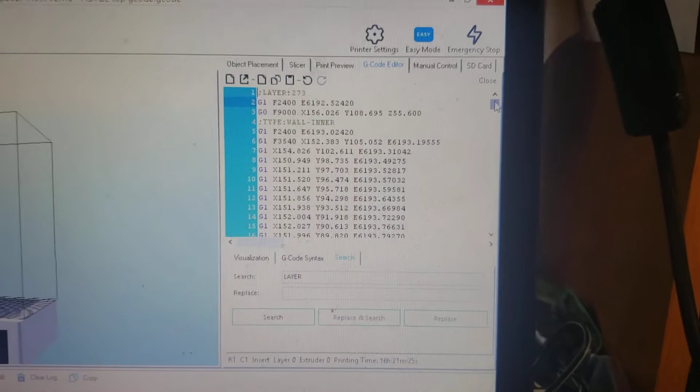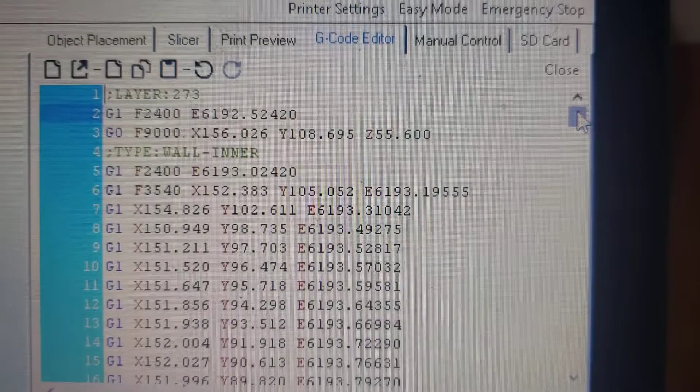You've got to erase the G-code that's already printed, so I've already done that. I'm going to start on layer 273, and the last reading I had on my printer was Z55.600. When I measure it with calipers, it's about 55 millimeters above the print bed, so I deduced it stopped at 55.600 and erased all that code. That's going to be the next layer, layer 273 is where I'll start. Looks good. So here's the problem.

They also said you have to home Y and X and Z, got to home all of them first, right? That's what you're supposed to do. So I've already preheated it, started heating my bed. I'm going to show you what it does.

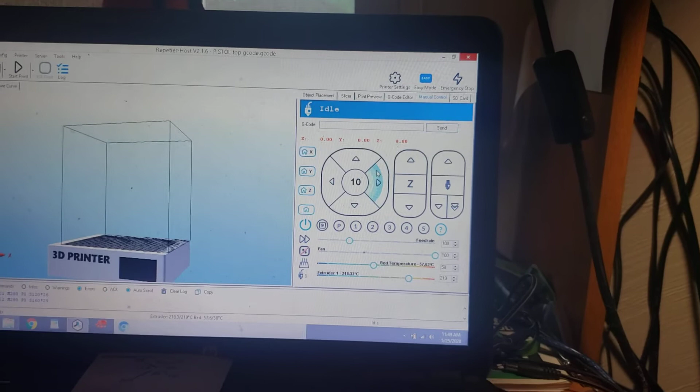It's kind of crazy. My problem is I can't home my Z because the print's in the way. So if anybody has any ideas, because I really don't want to start this over. It went 12 hours and stopped, and it was a 24-hour print. It's a lot of wasted filament.

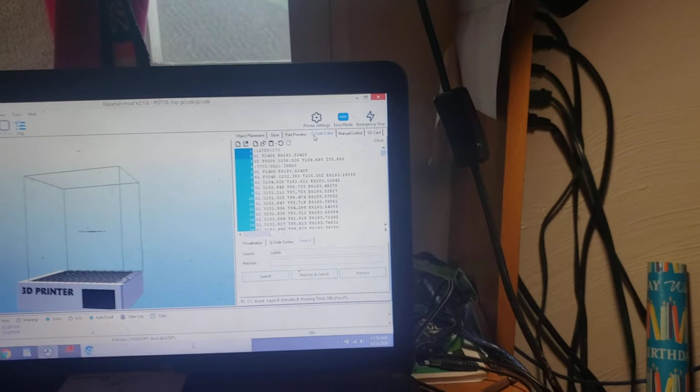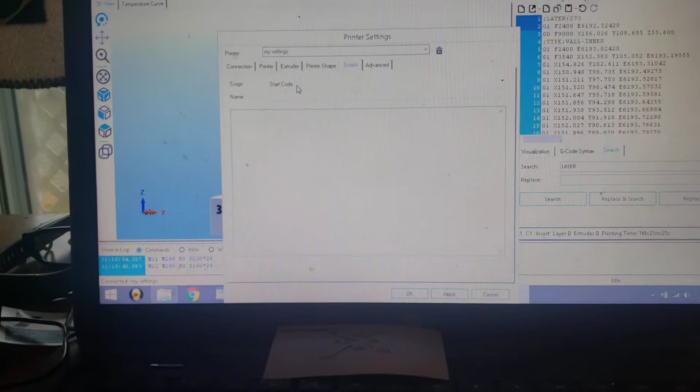So I need some help if anybody has any ideas. Here's what we're going to do. I've already edited the G-code and taken it out of my printer settings too. So I go here, config printer settings, and put it on scripts. My start code, I don't have the bed leveling or auto home in there anymore. I usually leave that in there so it does that first when I hit print, but it's all right, that's out. That was the other thing I was going to do.

All right, we're going to go ahead and hit print, and I'll show you what it does, but I'm going to hover over the e-stop just in case. Let me pull my BL Touch out, I've got to do that too, otherwise it'll be dumb.

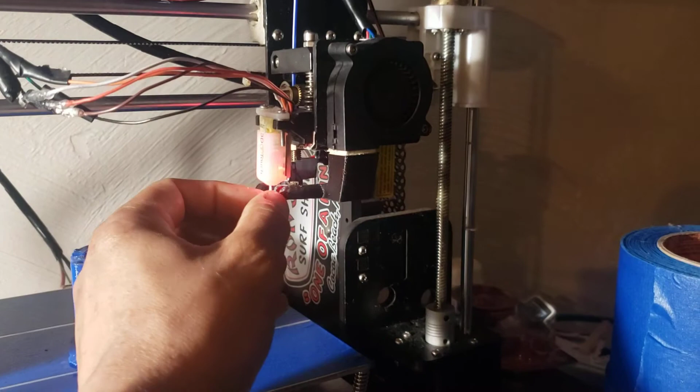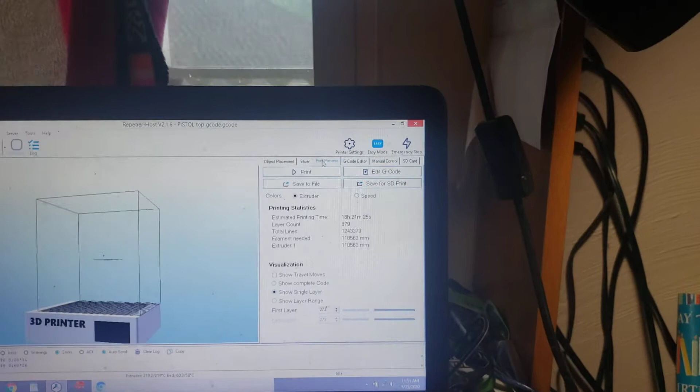So I set my script up for this on my BL Touch. Got to pull the needle out, then click here, that makes it do that. It's activated, we turn it off. Okay, and now we hit go. Remember, I'm hovering over e-stop.

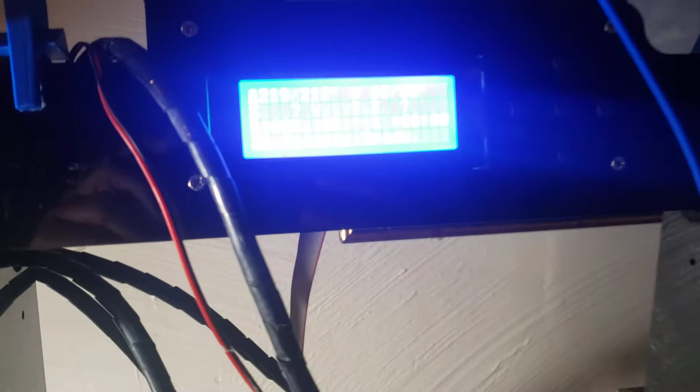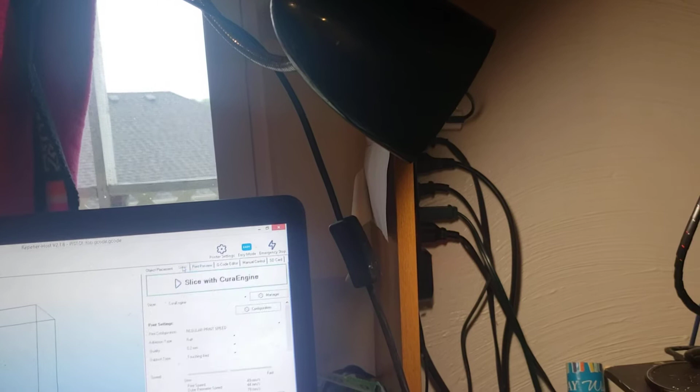Oh yeah, I forgot, my default setting on my printer is 219 and 58. However, with ABS... why didn't it work? Wait a minute. We'll reslice it.

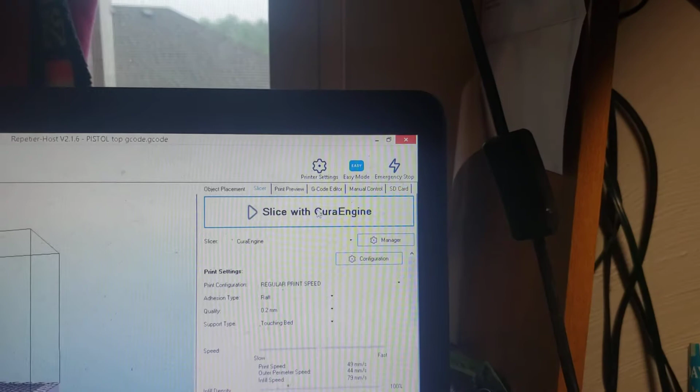I was thinking about maybe making a hibachi dinner, that sounds pretty good, maybe go buy some noodles. Some noodles? Is that where they grow in front of you? What the fuck? Really, we have everything except green peppers, I don't know.

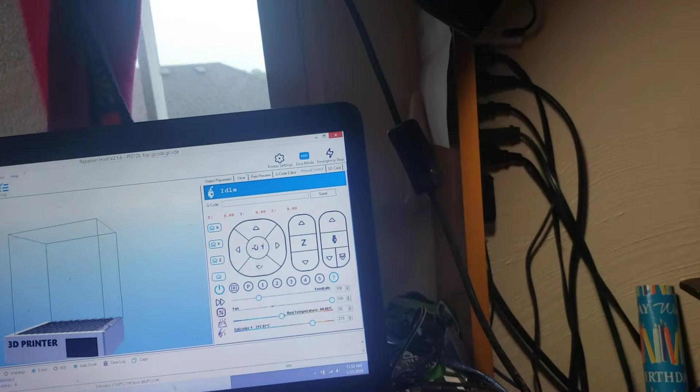Squash? I don't know, it sounds kind of gross.

Oh. All right, so let's do this, we're going to try it again.

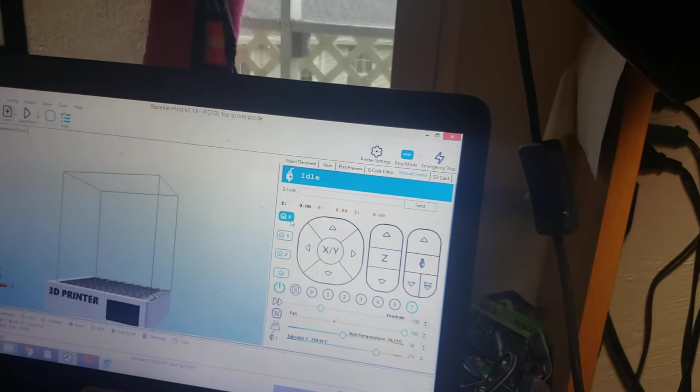I know he's not going to be able to grow anymore if he gets big, because he just runs up and bites you for no reason. And he bites, he's a little psycho. The other day I heard them.

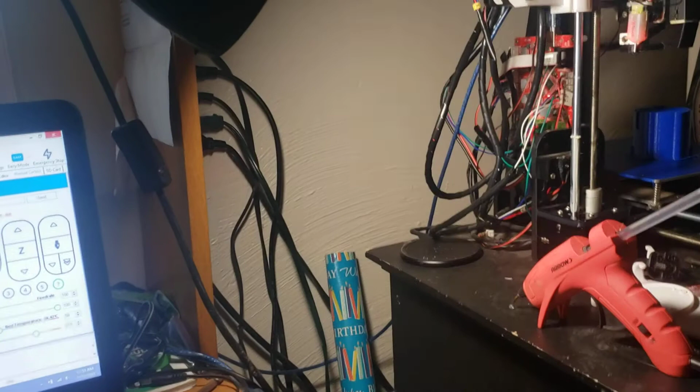Okay, those are both Z'd. So watch, I'll try this Z. The problem, guys, is my BL Touch is my Z stop, and I'm using Z safe homing. So this is what it does when I Z it. And obviously it hit the print, so that won't be a true Z.

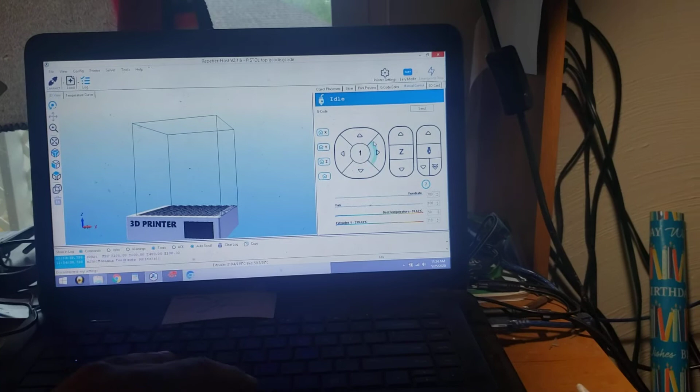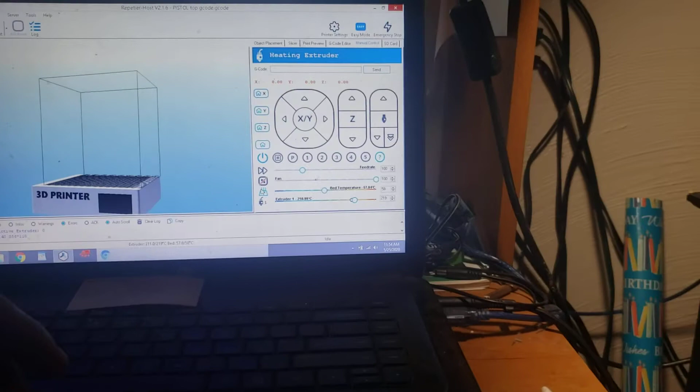So I'm going to stop it before it hits the print. Okay, as you can see, what I did - if you guys have any ideas at all, because obviously it's not supposed to go up to the top right. It doesn't think that it's...

Yeah, so it's just off a little bit, because the Z-offsets reset, I guess, after you reset the computer here or the 3D printer itself. So let's go back, I'll show you guys again so you can see, because we just homed X and Y, homed Z, and it almost hit the print, so I stopped it beforehand. So I need to get my Z axis with, you know, the BL Touch attached.

That means that's the problem - it's using Z safe homing, and it's also using Z as the end stop. So if I have to reset or restart, it's almost impossible for me to get it, I guess. I don't have any ideas on how I'd get my Z axis with those two dilemmas. So if anybody has any ideas, please help. Thanks.